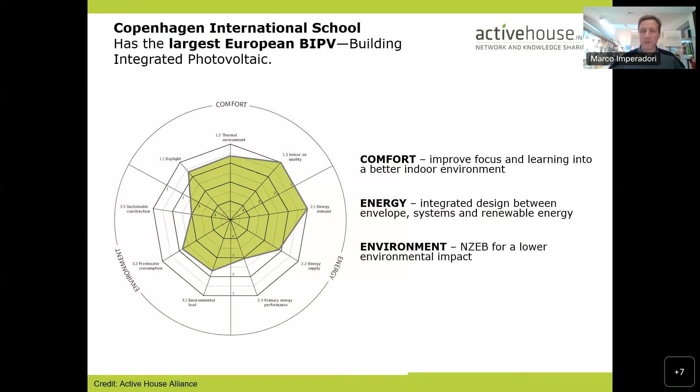Here in this picture you see one of the active houses, winner of the Active House Award, a school in Copenhagen. Beautiful, with a big radar. The radar is a synthesis of comfort, energy, and environment, which is the mantra of Active House. Big radar means big integral, big area, great performance. And of course, beautiful space, nice design, nice architecture.

Look at the facade - it's BIPV, Building Integrated Photovoltaics. So in this case, the signal, the sense, is the sense of energy, getting the energy from the sun as much as we can and bringing it back to the user in a nice way, also beautiful, as New Bauhaus asks.

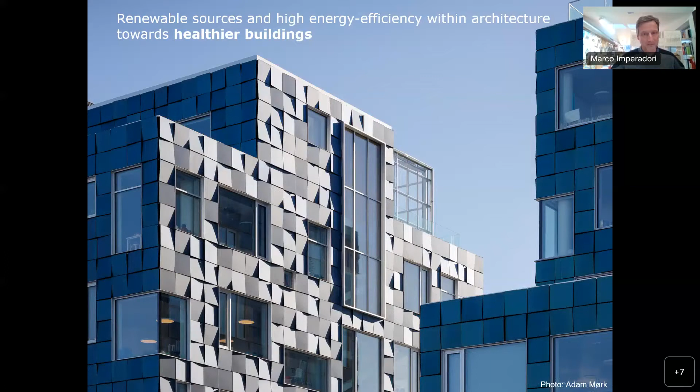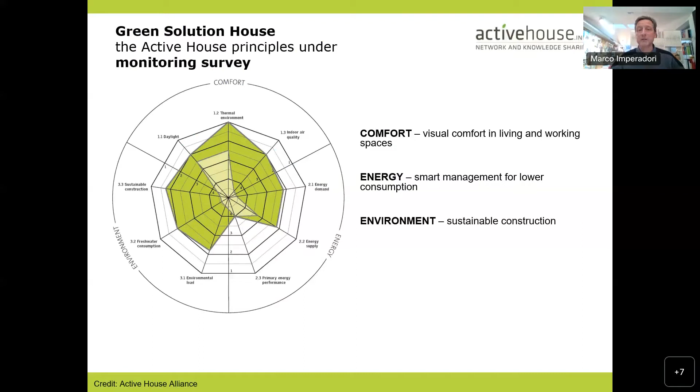Then this is another winner, and this is a cognitive building. It's the refurbishment by GXN 3XN of the Green Solution House in Bornholm, a former hotel becoming renovated with a radar. You see the first radar in light green, and then the big radar after the refurbishment with high performance and fully sensorized - so the building has sensors.

These sensors, what do they sense? They sense what we cannot measure, we cannot see. For example, now I'm in my room here, in my lab that I will show you soon, and I cannot smell CO2 because CO2 has no smell. But if the concentration in parts per million of CO2 is too high, then I get tired. And even the COVID virus stays alive when we are in an atmosphere with a lot of CO2. If we have oxygen, the virus cannot survive.

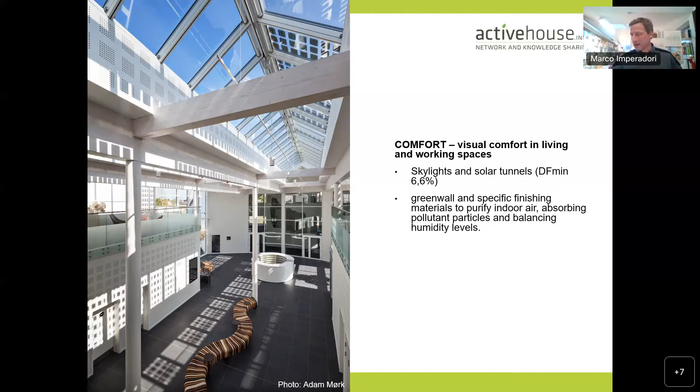Let's speak from where I am. I am in Milano, the capital of Lombardy, an impermanent city, constantly changing. And even here in Milano we can experience this, which is what VELUX called - we did a lot of research together with VELUX - the indoor generation. We are in the indoor generation. We are part of the indoor generation.

Also today we are speaking from a distance, thanks to technology, closed in a space, and some space is healthier than others, but in general people in this society live like that now. And the quality of air is not only a matter of energy - discomfort from temperature, we can feel a little, too cold, too hot, more or less we understand. But CO2, VOC, PM2.5, PM10, we cannot. They are extremely dangerous for us.

So again, let's think that the microsystem inside, which is the building where we live, is about comfort. The macrosystem outside is the impact on the environment that we give with our choices of materials and with our running time choices. The energy is the balance due to the frontier, due to the building.

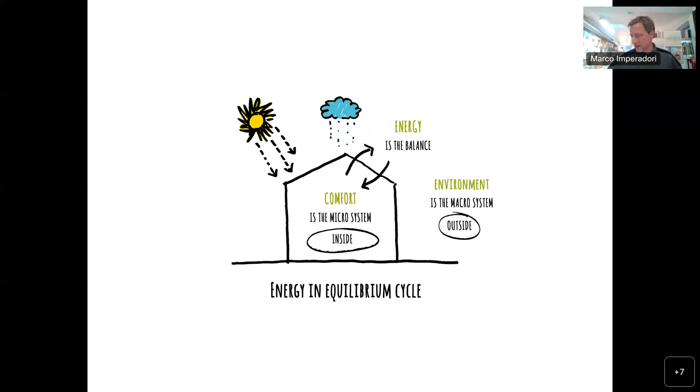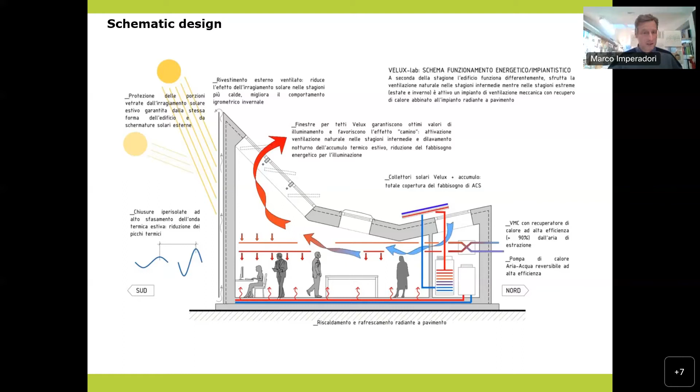In the extreme climate, we have a heat pump powered mainly by PV, and we have heating and cooling from the floor. This is the system that allowed us to be a nearly zero energy building, the first active house in Italy, and many other things.

To design these, we measure before and also during the occupancy of the building, which is a constant experiment. The quality of light, you see left and right: left is with the zenithal light, right is without.

The glass today, triple glazing, very much insulated with krypton, argon, xenon, are very good for energy but very bad for light. And this is not comfort. We cannot live like that.

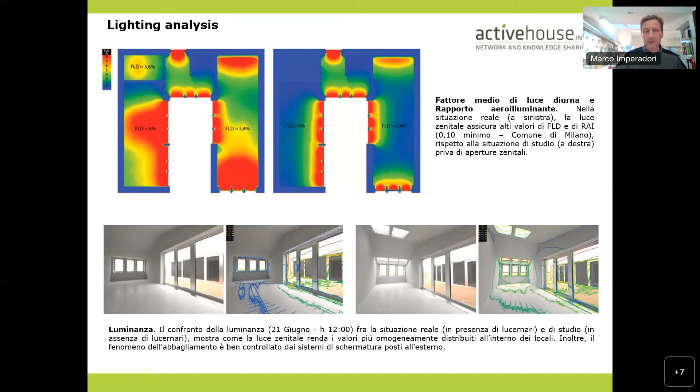The roof windows in this case are our wind chimney that can help in the middle season, or even in some cases for hybrid ventilation.

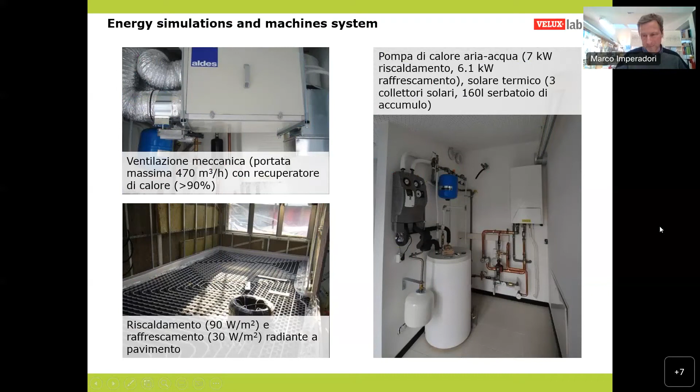So this is the power plant of the building. You see the radiating floor, the machine for the heat pump, the energy recovery ventilation, mechanical heat recovery, with a total enthalpy recovery.

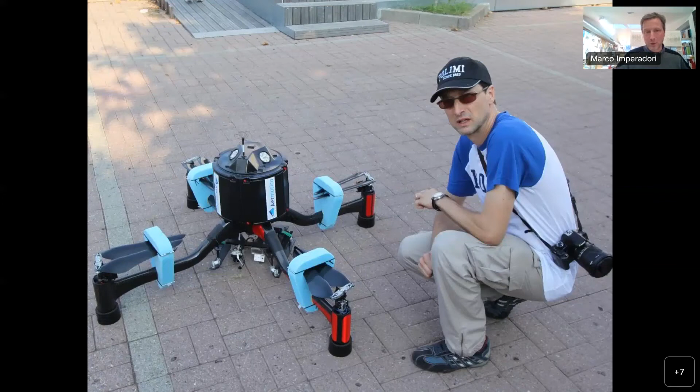Here you see some experiment, done in 2013. We were flying over with this quadricopter to measure what we don't see.

And this is because we have created cities which are totally unnatural, too much sealed on the ground, too anti-natural in a way.

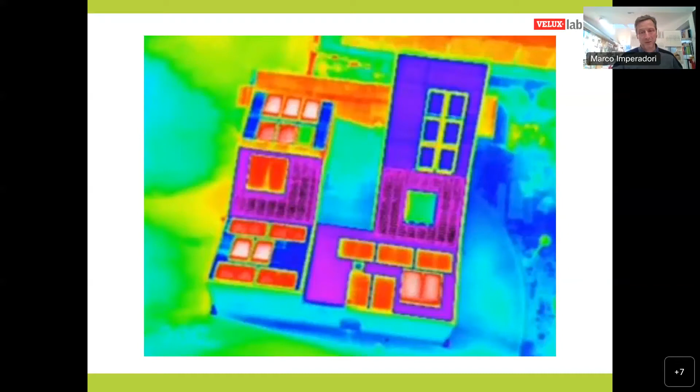In this case, we changed the roof and we placed a green roof in the flattest zone of the roof where the heat was higher due to the summer irradiation.

Then PV on the other side, so heat production, in this case energy production for the heat pump. And then this is the north pinnacle—you can see that the opening works to create ventilation in the middle season.

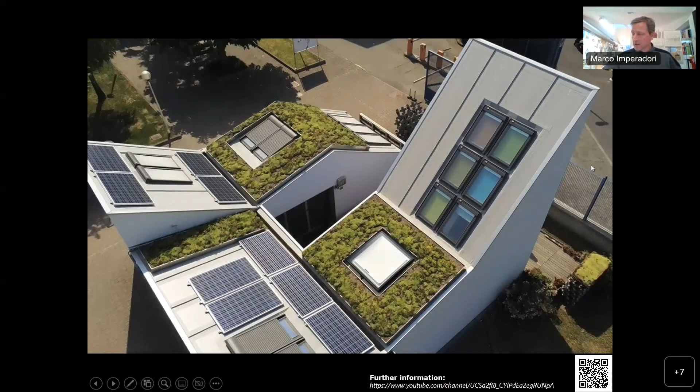Nature is a net. You know that the roots communicate over a long distance. When you have parasites, they can communicate 30 kilometers distance. And so we want to conceive the city, our buildings together connected, helping each other, giving energy to each other and information.

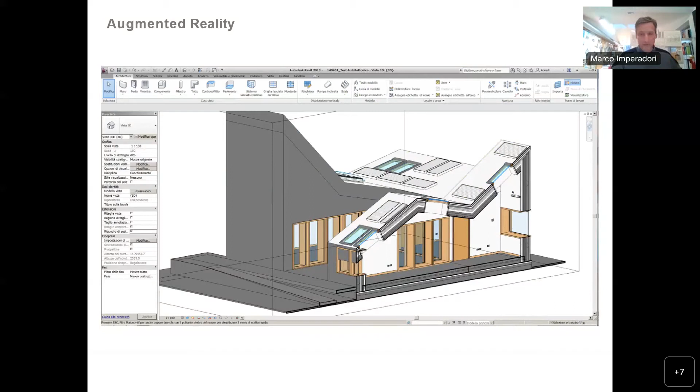So the building has a digital twin. This is the Velux Lab, the digital twin, the building information modeling digital twin. We have sensors everywhere. Some of these sensors, like in this case, are very engineeristic—you don't understand them. But what we are interested in is the user-friendly sensors that I will show you.

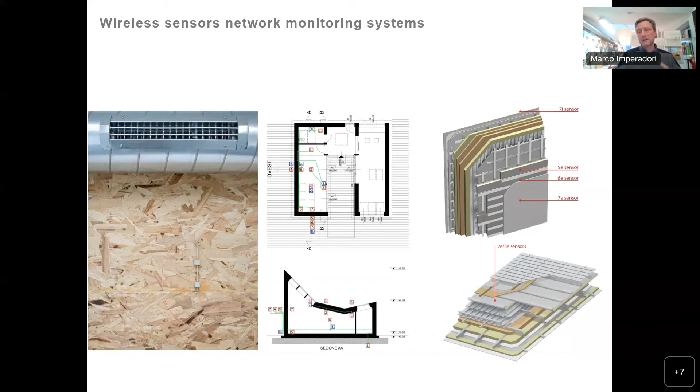They make sense because when we use this, we don't understand how much energy is behind it, we just use it. So you see, these are some very engineeristic sensors that I'm not speaking about.

But we have to think about sensors like we think about the evolution in building, like we think about the evolution of other kinds of industry. It's very visible, the evolution in cars, in IT, etc. So in a Darwinistic way, we have to think that the building can be sensorized and communicate easily with us, telling us something we don't see: CO2, temperature, humidity, PM2.5, VOC, PM10.

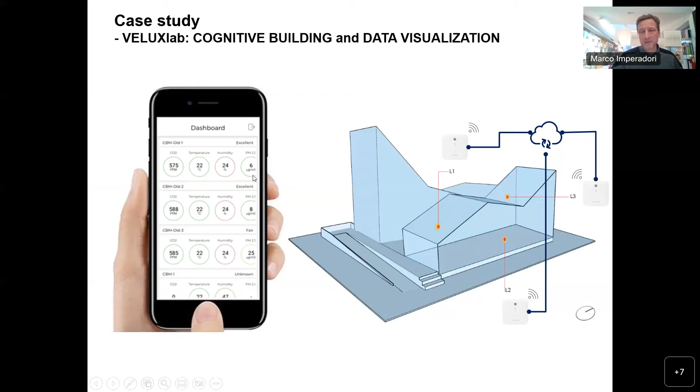And so this network with nature and the resulting radar—this is the radar of our lab where I'm speaking now—can be active in the sense that it can be used in an optioneering phase to design the building, freeze it with a radar, active house, and then also measure.

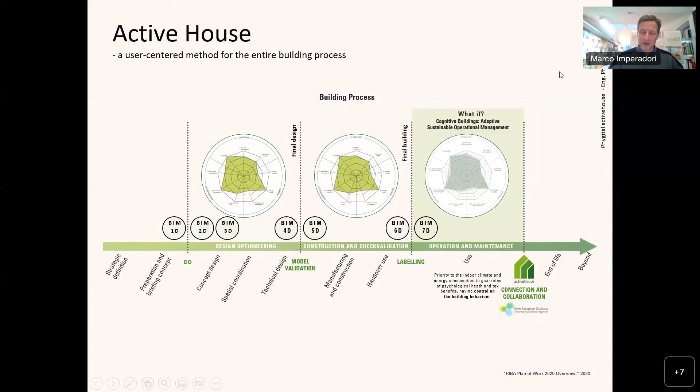This is the current research by PhD Nicole Di Santo, my PhD scholar, about the phygital active house. Phygital is interesting because it matches an idea—it's an idea to match physical and digital. The digital we have, the physical is different. It can be like clothes, from S to M to L to XL. XL is the city, and we can interconnect them in the city.

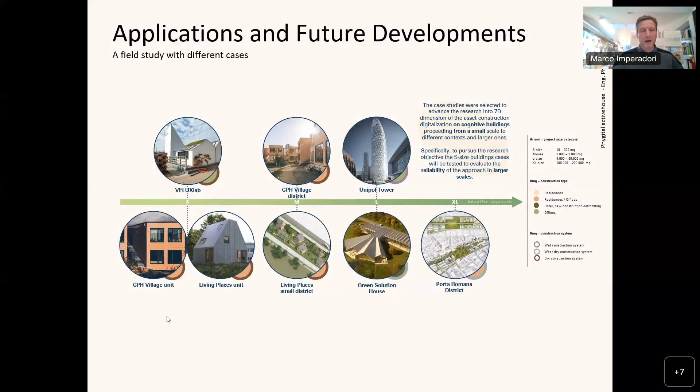In these experiments there is a parallel experiment in Italy and Denmark—Milano, Copenhagen. The two cities are very much friends, and we are now sharing different dimensions of this evolution instead of revolution in building.

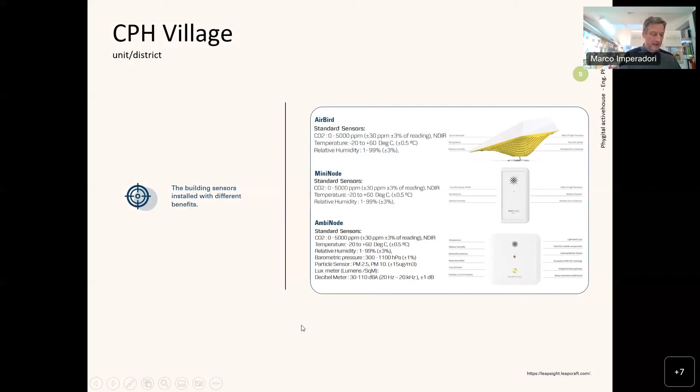This is just an evolution like we experience with sensors. When I'm speaking, I have on my desk a couple of sensors. Now I will show you. This is an experiment in Copenhagen CPH village, and here it was fully sensorized. You see the Leapcraft sensors. Leapcraft is one of the stakeholders of Active House Alliance. Here you see my PhD scholar, Nicole, with Leapcraft founder Vinay Venkatraman, and some sensors.

They are also nice to be seen. This is nicely designed by GXN 3XN. I can show it to you. This little bird is a sensor of CO2. When CO2 is too high, it starts to tell you CO2 is too high, so you need to open the window. This is extremely educative in schools, for example.

Then you have more complex sensors. They can measure more things, like this one. We were mentioning CO2, humidity, temperature, light, VOC, PM2.5, PM10, etc. But then the user can interact easily with this kind of box. Instead of the bird rotating, the box gets out information on how they are feeling in that moment.

Okay, then you can measure the blood, whatever. This is extremely physiological. But what you are interested in, the big numbers, is to see the reaction of a very comfortable place, energy, let's say, respecting, and also environmentally respectable of the environment.

Here you see the final experiment we are doing is with Alexa and Bticino, and Velux, because we are interconnecting the two systems. Just by vocal order, we can open or close the window, we can slide down the sun shading. And you may say, well, why do we need all this automation? Because now it's easy. With ZigBee, etc., it's no more like before. It's not domotic. It's totally different.

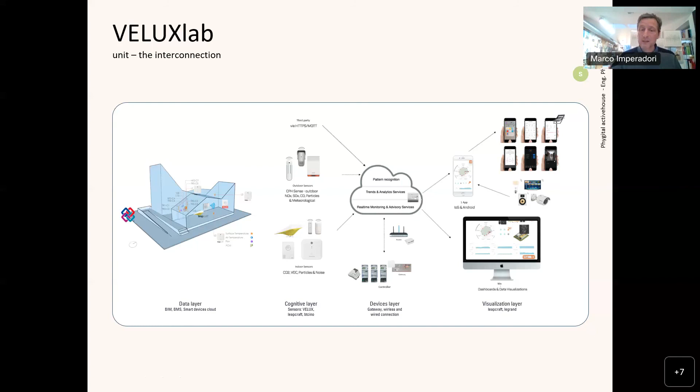The building industry was always lethargic, but now we have all these devices. They can be extremely interconnected to the situation that we are already experiencing and connecting to nature. Because in this way we can measure, we can even have predictive engineering to understand what the weather coming will be, so if we need to store more energy or less. Now with this big data processing, it can be easily processed and seen synthetically, not engineeristically.

If we think that we should be all engineers, we are wrong. Our clients are not engineers. Our client can book a train with the telephone. Even my mother, she's 81, can do it. So they can easily get the communication on our IT network.

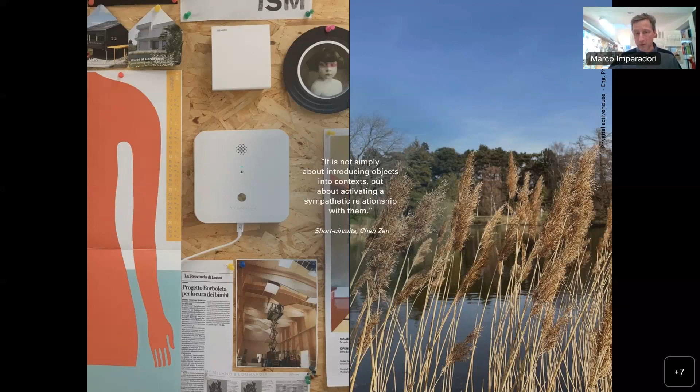So finally, getting to almost a couple of minutes to the end, I like Seneca saying: there is no favorable wind for the sailor who does not know where to go. Maybe these are just some hints for a new direction, and I believe that Active House is a new direction.

And if you see all together, what we need now is to live comfortably, use renewable resources from nature, especially from the sun and the earth and the ground, being connected to nature and the universe, respect the environment, not only during construction but during the lifetime of the building, which is much more impactful. And then to use invisible technologies. All these sensors, we don't see them. They are not impactive. It's not a machine. The house is not a machine.

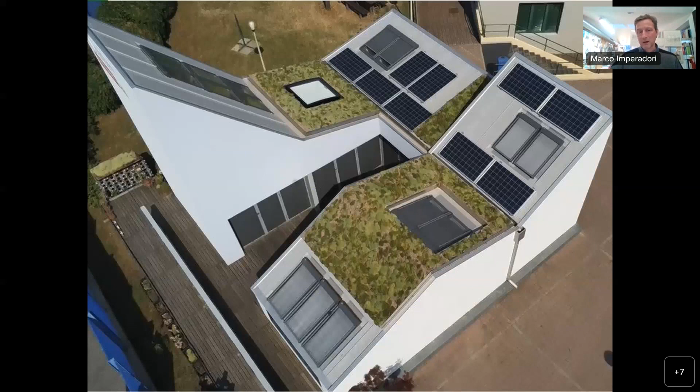So finally, you see, this is how it looks from the top. It's a living building. We had millions of visitors. Flowers, you see here. Why do I say millions? Because we also have birds, butterflies, insects, whatever. I think it's a real pleasure to live here, and in this building, which is just a part of this big experiment, is how to raise buildings to a new cognitive situation that can help us to live better and to be active in this new way of conceiving architecture and construction. Thank you very much.